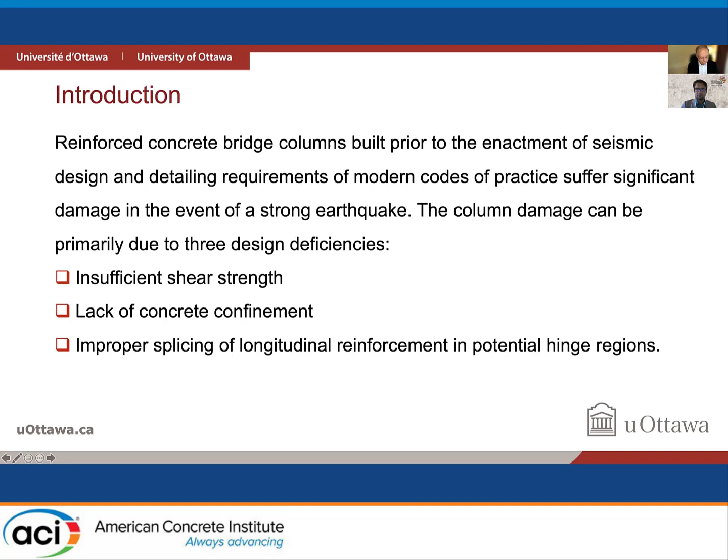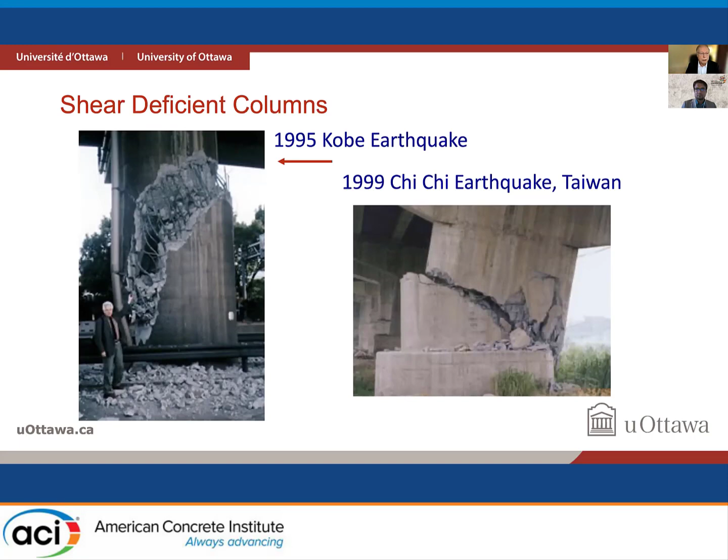Any one of these deficiencies results in significant column damage. I don't need to go through many examples, but we all know that especially short columns can develop transverse diagonal tension cracks caused by shear, and not having sufficient transverse reinforcement results in shear distress.

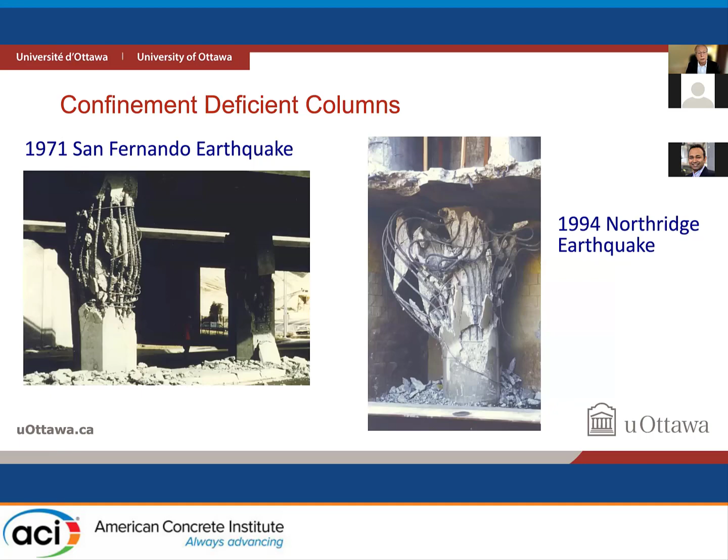And we can also find some examples of lack of splice deficiency in columns. So what I will be presenting to you is called RetroBelt, a seismic retrofit and quick repair technique.

It's a system of external prestressing, basically applying transverse compression on concrete in order to, number one, not allow transverse expansion, and this would occur, of course, if you have shear deficient columns, and there's a tendency to develop diagonal tension cracks, or if there's not enough confinement reinforcement.

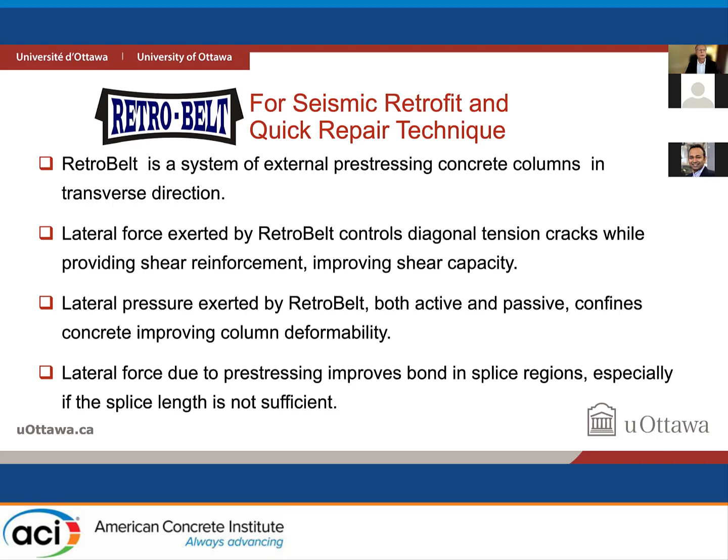Of course, for columns to fail, they have to expand laterally. Once again, lateral prestressing would eliminate or reduce this tendency of lateral expansion, and it also provides lateral clamping forces to improve bond in these splice deficient regions.

The technique is fairly easy to apply, and all you need is prestressing strands. In our experiments we use 7-wire strands having 15 millimeter nominal diameter, and then there are special anchors which tend to connect the two ends of individual hoops, and then a hand-held jack to apply prestressing.

Here you see on the right-hand side a circular prestressing application, and then on the left-hand side application to square and rectangular columns, which I will expand on a little later.

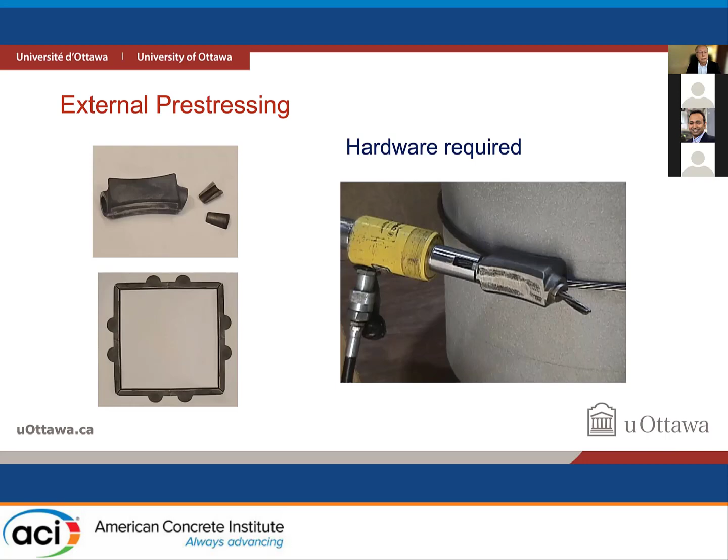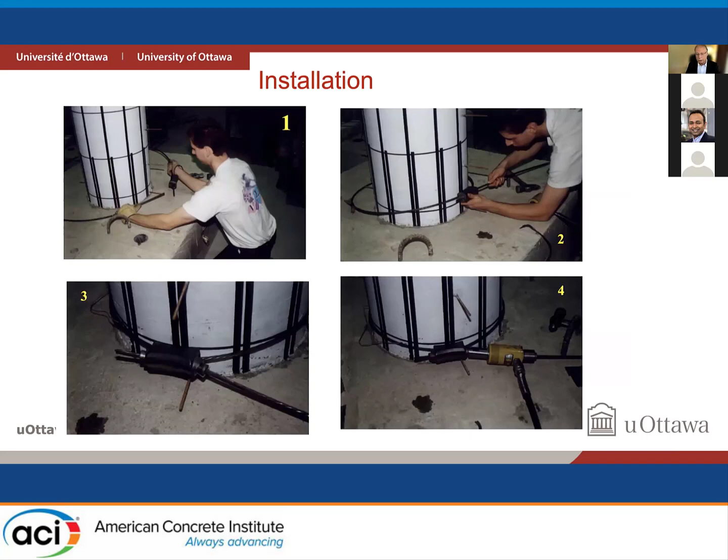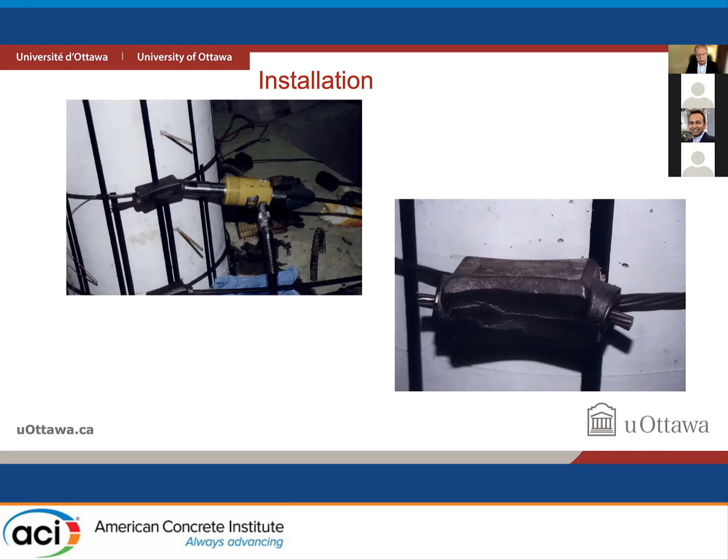So the sequence of application involves cutting the strands to appropriate length, and then inserting them through the anchors. The anchors have prestressing wedges at the ends, and then you have to apply prestressing by means of a hydraulic jack, and then you lock them, thereby prestressing the columns in the transverse direction.

Here's an application for square and rectangular columns, which does create challenges. In circular columns, obviously, hoop tension would provide uniform lateral pressure. But when we have square or rectangular columns, then we need to...

complete their geometry to either circular or elliptical shapes by means of, in this case, using steel HSS sections as spacer units, and then welded to it are half pulleys, as you can see, and this does increase the possibility of developing uniform stress.

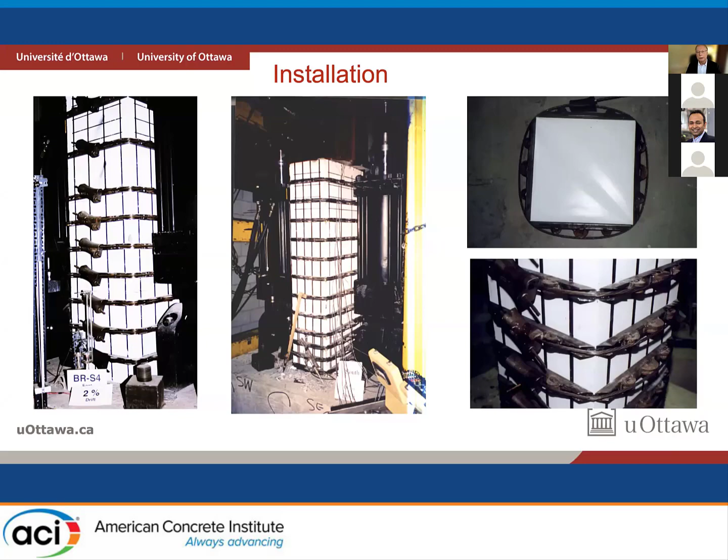And you can see on the right hand side the top view, even though it's not a perfect circle, it does apply close to uniform lateral pressure.

The first test that I will show you is a shear deficient square column, and this column has 550 millimeters square cross section, 10M ties, which we're having 11.3 millimeter diameter, spaced at 300 millimeter spacing. This certainly does not conform to current codes of practice, and hence it did fail at about 1% drift.

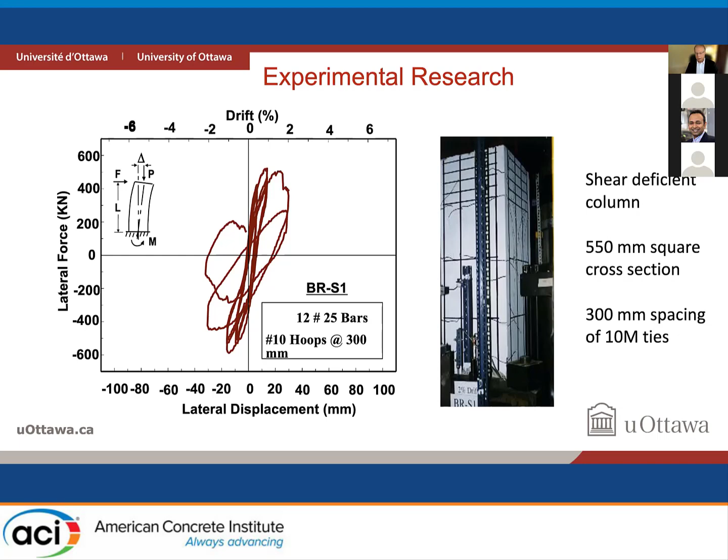This is a 1.5 meter tall column representing shear span, basically half the length of the actual column with fixed ends. As you can see, this was shear dominant, and you could see diagonal cracks forming on the right-hand side.

But once we applied transverse prestressing, in this case, we went up to 25% of ultimate capacity of the 7-wire strands, which was 1860 MPa strength wires, with a spacing of 150 millimeters. So the original column had 300 millimeter ties; this time we added 150 millimeter external prestressing strands.

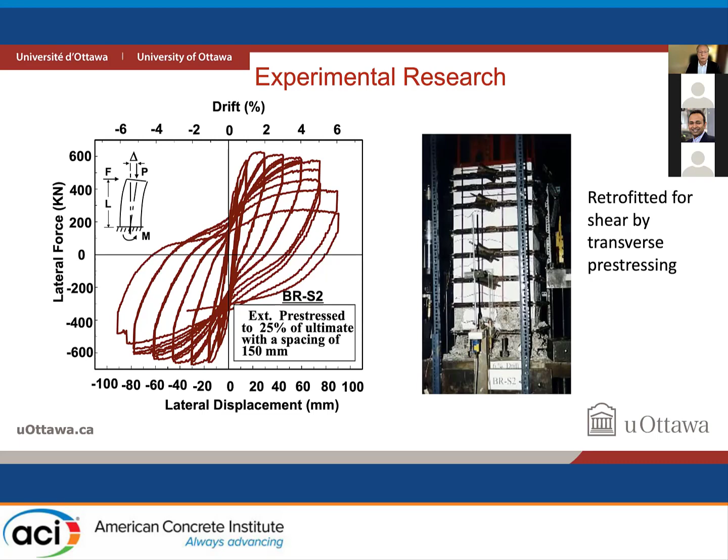The hysteretic response improved quite drastically, and there was virtually no strength decay up to 4% drift, with a gradual strength decay starting at 5% drift. So this is a significant improvement in shear resistance.

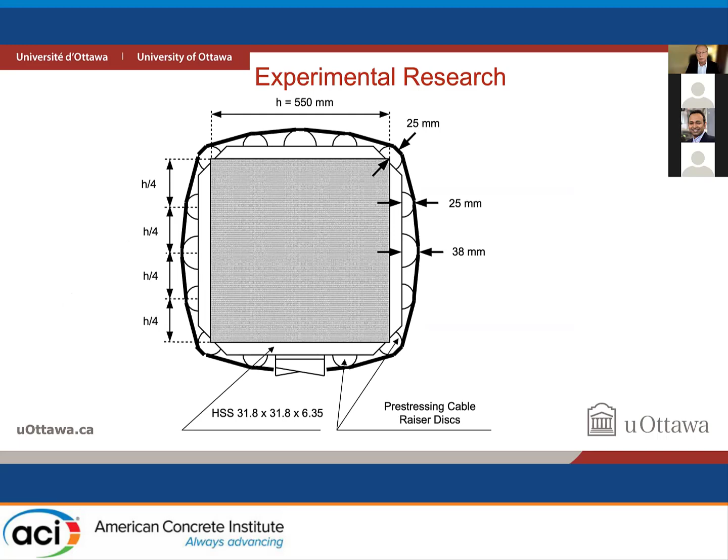Here are the details of the raiser discs and how the prestressing force was distributed around the perimeter of the exterior of the column.

Similar to the previously tested square columns, they started developing diagonal tension cracks, which started increasing at 1% drift, and we cycled at 1% three times. As we pushed the column towards 2%, it basically started unloading and suffering shear failure.

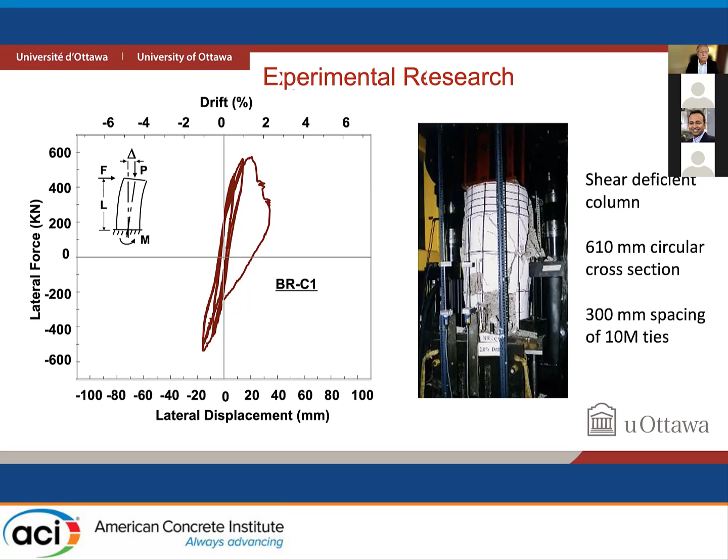Another example of insufficient column design was lack of concrete confinement. This time we tested a 2-meter long column, typical of a 4-meter column with fixed ends, because this was up to the point of application of the load, so it's representing the shear span. So these were flexure dominant columns.

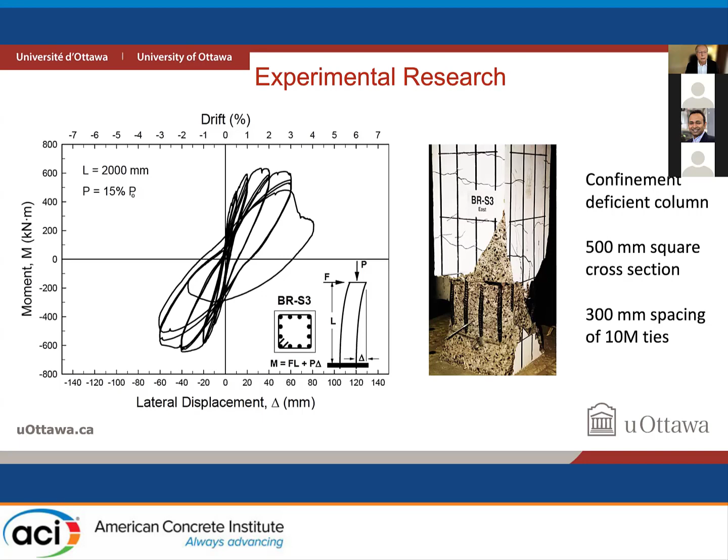When we applied transverse prestressing, once again at 25% of ultimate capacity, and I will discuss the significance of initial prestressing when I talk about the design procedure, we were able to develop 4% drift without any problem. Once again, strength decay started taking place at 5% drift cycles.

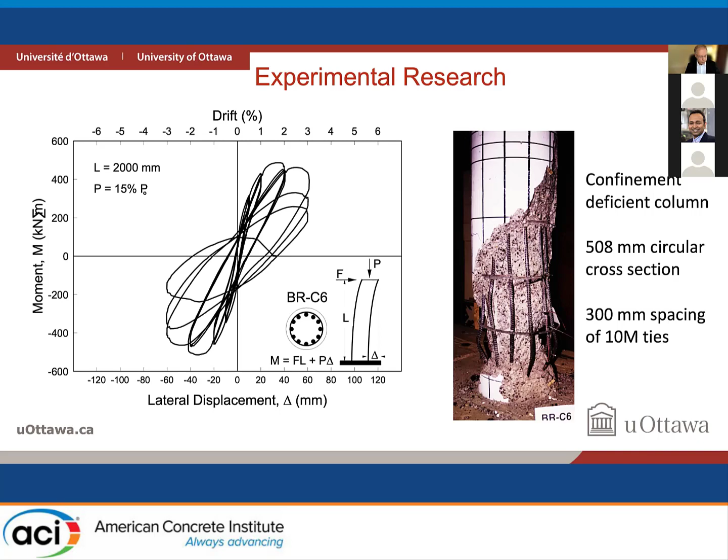Another example, this time a flexure dominant circular column, having 508 millimeter circular cross section, similar detailing of ties, and similar response as the one we just discussed for square columns, basically completing 2% drift cycles, but suffering damage at 3% drift. But upon transverse prestressing, we went up to 4%, showing similarly improved behavior.

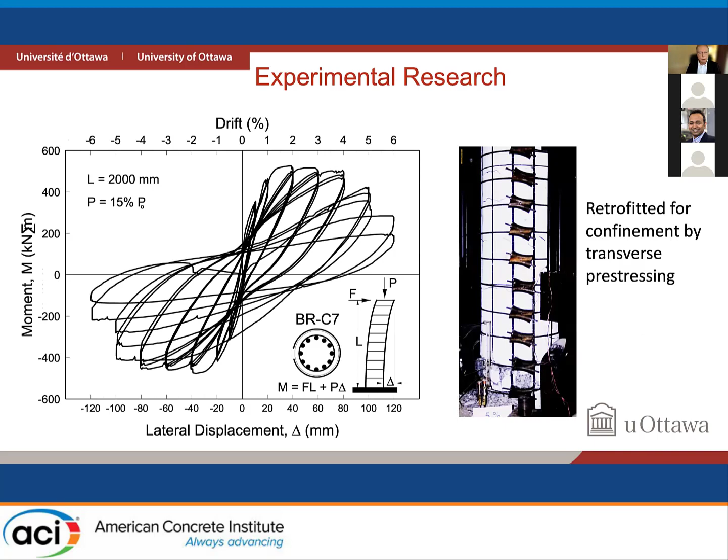Another set of columns that I'd like to show you are the ones that had splice deficiency. Here we had 300 millimeter splice length. This is not acceptable by current standards, whereas it was permitted prior to the 1970s and even 80s.

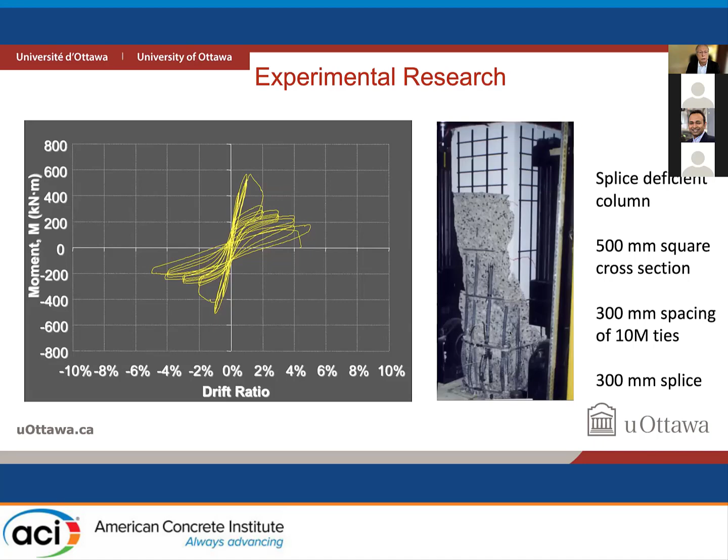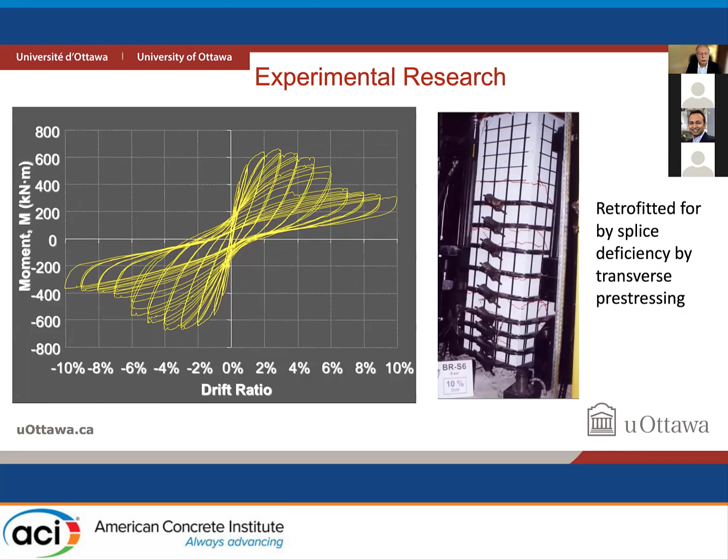Here you can see at 1% lateral drift, the bars started slipping. You can see significant pinching of hysteresis loops and strength decay by almost 50% upon forcing it to deform to 2% drift. The companion column was retrofitted, as you can see in the splice region, and this provided clamping force, and we were able to get 4% drift without much decay.

I'd like to discuss the design procedure for these columns. First of all, for confinement design, we had developed earlier a design expression for confinement of columns as a function of drift ratio. This delta shows the drift you wish to attain.

You may want to go up to 4% drift if it's in a seismically active region, but 2.5% drift if it's moderate seismicity. So the transverse reinforcement ratio—area of transverse steel divided by bc s, the concrete area—could be obtained with this expression, with certain limitations: cover to core area ratio not to be less than 0.3, and axial load ratio at least 20% of P naught.

And these are the limitations within which the expression was calibrated against test data.

So for external prestressing, we could use the same expression, but Kc is the effectiveness, or confinement effectiveness parameter. It's equal to 1 if you have the best confinement arrangement, which is circular reinforcement with uniform hoop tension. In this case, because we're providing almost perfect confinement either on circular columns by direct application or square and rectangular columns through those razor blocks, Kc can be taken as 1.

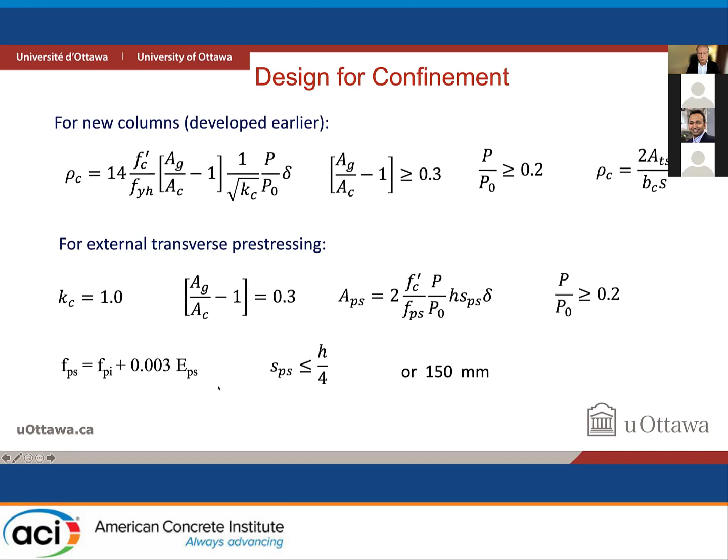This would induce active lateral pressure, but it also has capacity to confine in the passive pressure range, as the active pressure is neutralized, then the column has ability to expand laterally. In our experiments, we recorded 0.3 to 0.5% transverse strain before the column started decaying, and hence in our design expression, we allowed 0.3% transverse straining. That is to be added onto the active pressure range. The spacing is limited to h/4 or 150 millimeters, whichever is smaller.

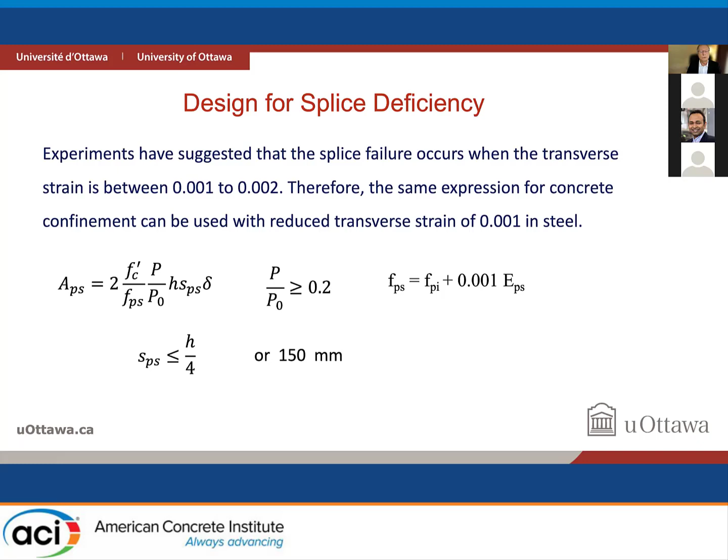For the splice deficiency, we use the same expression for determining required area of prestressing. However, experimentally we observed that slippage takes place at 0.1 to 0.2% transverse strain, and hence we limit prestressing stress to whatever initial stress is applied, plus only 0.1% of concrete expansion before the bars start losing their bond and start slipping. So it's the same expression with tighter limitation for lateral expansion, which can be used for splice deficiency design.

Shear design can be similar to the VC plus VS approach in reinforced concrete, but this time we have V prestressing, the shear resisted by prestressing force, and prestressing force would then be equal to, once again, the stress in prestressing. Here we're assuming that VC is active up to 0.2% of transverse strain. This is consistent with grade 400 MPa steel, or 60 KSI steel. Of course, when you go beyond that, then diagonal tension crack capacity or aggregate interlock may not continue resisting VC, so we've taken that as a limit. Other than that, we've simply added VP, which provides active prestressing as well as additional shear reinforcement.

I'd like to say a few words on use of the same technique for repairing columns. Here we're looking at a repaired column. Maybe I should...

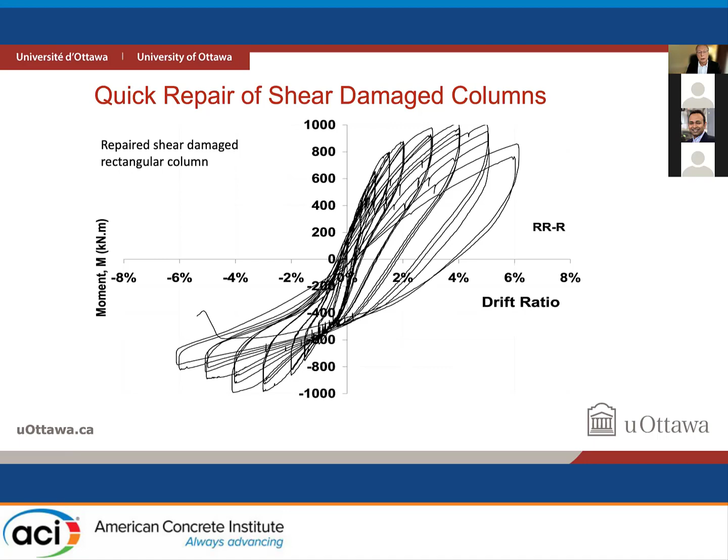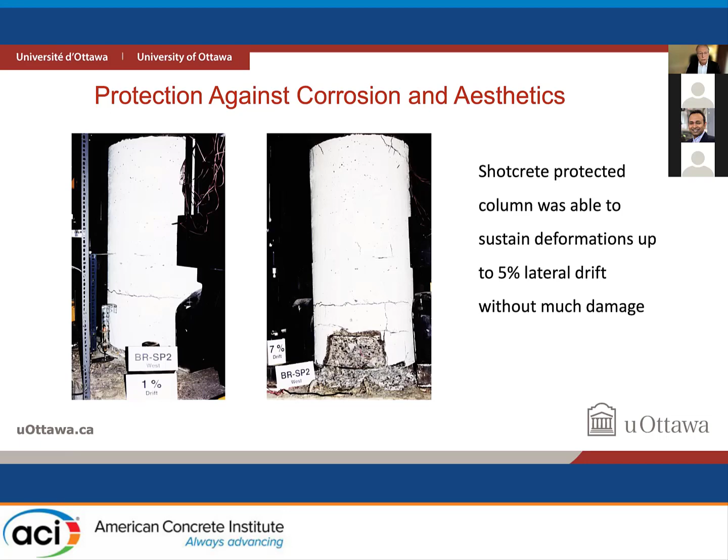One has to talk about protection against corrosion of the steel because it is placed externally, and we tried different ways of protecting steel, including using sacrificial devices to prevent corrosion. But no matter what you do, there's an aesthetics problem. You certainly don't want to expose these retrofit belts, and one could use maybe column covers, or in this case, we tried shotcrete, and we were able to go up to 5% lateral drift without shotcrete detaching from the column. So this is one way to protect against corrosion.

A typical field application would involve only closure of one lane, and then a single elevator-type crane with two laborers would be sufficient to apply this prestressing. So this is in terms of construction time as compared to steel jacketing, for example. It is much quicker and much cheaper, as steel cost goes by weight, of course.

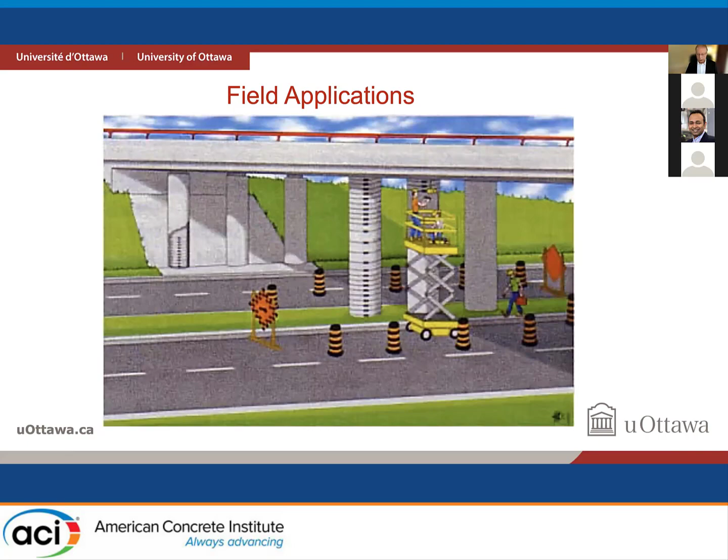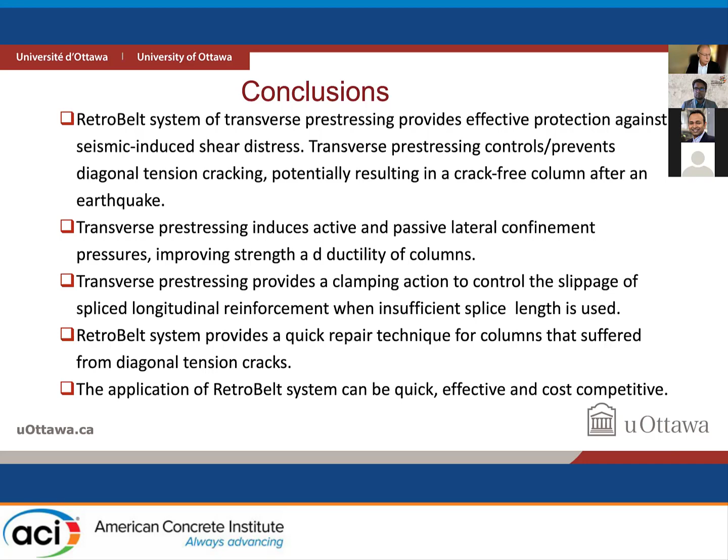So here's an example of how it can be applied in practice. I'd like to conclude my presentation by reiterating that the RetroBelt system of transverse prestressing can be used to control diagonal tension cracks due to shear, and it also induces additional confinement pressure while providing clamping forces in the splice deficient regions, and the application can be quite cost competitive.